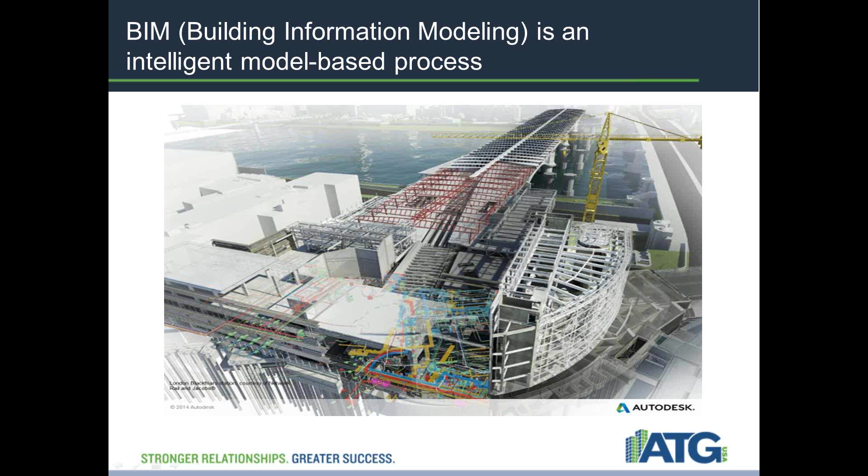So building information modeling is an intelligent model-based process that provides value across the life cycle of a project. That's any project. BIM is the first truly global digital technology and will soon be deployed in every country in the world. The BIM process involves creating and using an intelligent 3D model to inform and communicate project decisions. A process shift to building information modeling can fundamentally improve the way we plan, design, build, and manage our building infrastructure.

The U.S. McGraw-Hill Construction Research on BIM from 2007-2012 shows an expansion of BIM adoption over that period. The U.S. is not the only country implementing this BIM software. Scandinavia, Australia, and more recently South Korea have adopted BIM and are utilizing it as well.

BIM also contains most of the data needed for building energy performance analysis. The building and properties in BIM can be used to automatically create an input file for building energy simulation and save a significant amount of time and effort on your side. Moreover, automation of this process reduces errors and mismatches in the building energy simulation process.

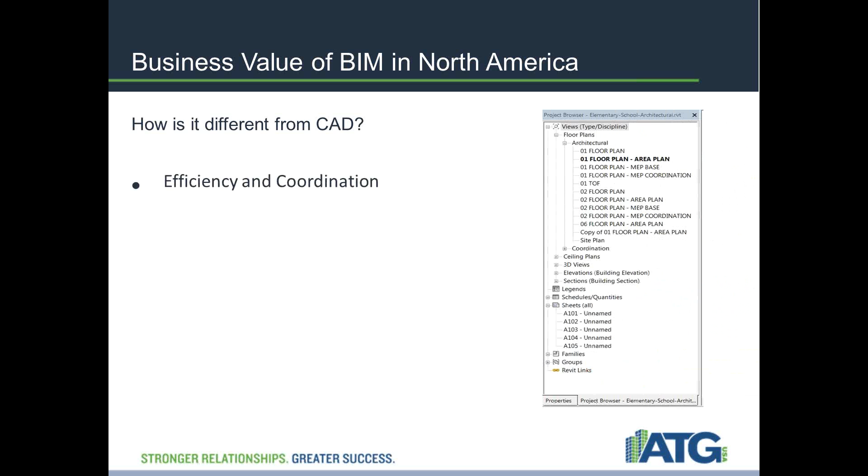So how is this different from CAD? In the traditional design process, individual 2D designs are passed between consultants and manually checked. With BIM, the intelligent models of the building can not only be passed between consultants, but also combined into a single model and checked with clash detection software to ensure coordination. Everything can be quickly accessed through the project browser. This is faster and also reduces the chance of human error, as information does not have to be continually recreated. This also reduces errors and omissions.

All design information is stored in a single coordinated model, enabling you to generate every schedule, drawing sheet, and 2D and 3D views directly from the model. Revisions to your design are automatically updated, minimizing errors and omissions. As you can see in the project browser, we have all of that information stored in one model.

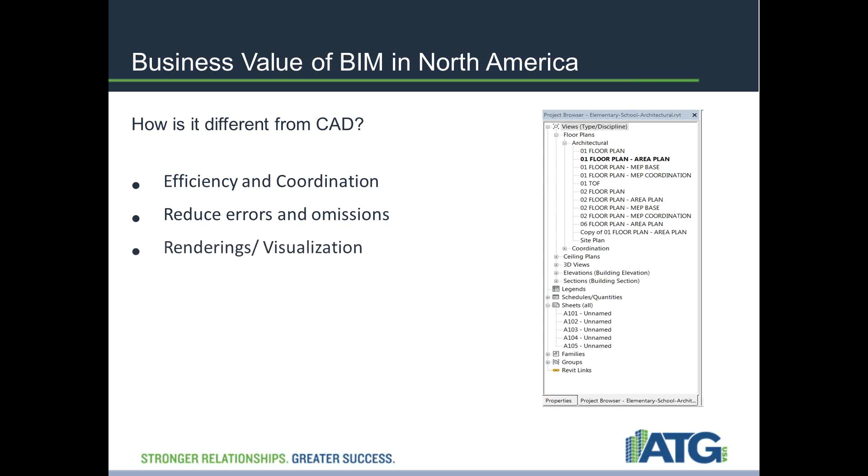Also, rendering and visualization of the BIM model creates high-quality photorealistic 3D renderings, which build a visualization tool that impresses your clients and ultimately helps you win business.

In this workshop one, we're going to be covering some topics: building a mass model. We'll be creating a new solid form. We'll be joining some of those forms together. We're going to be creating a solid and void. We're going to be creating a lofted form out of that. And finally, we'll be saving and loading that into a project.

So for what that looks like, we're going to go ahead and start with a mass. A mass is a solid or void form typically used for conceptual design and the sketch phase of a design. With the massing tools available in Revit Architecture, you're able to create a composition with free forms quite easily. Smooth corners, curved walls, and curved holes in walls are all possibilities with the massing tools.

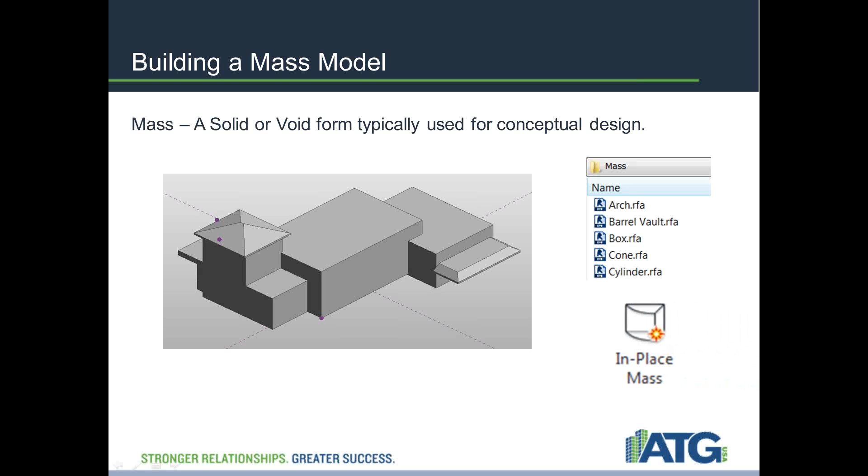Some of the methods that are provided in Revit that allow you to do this is conceptual massing in Revit. The first is to make a conceptual family, so you can utilize some of the family content that's provided in the Imperial Library to produce, use and manipulate some of this mass content to be able to build that. The second way is to make an in-place mass. So you'll notice that icon that I just pulled up there. That'll give you the option to create a mass in place.

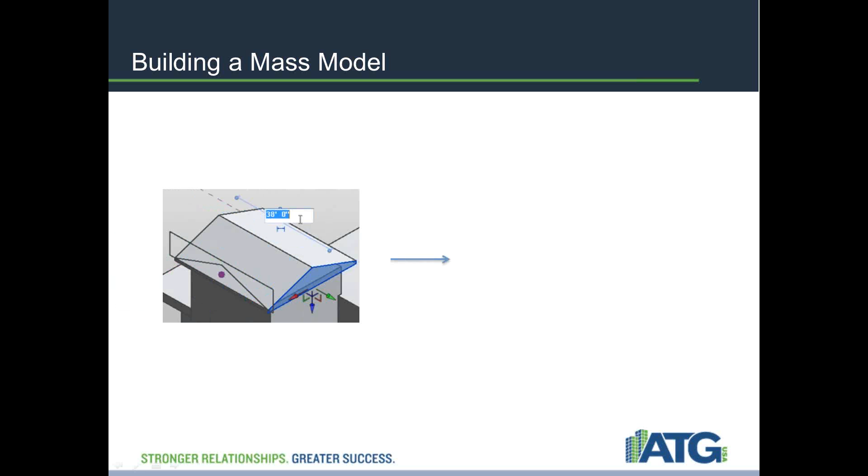So furthermore, in the workshop, we'll be using the existing mass modeling tools and some of the additional mass modeling tools inside Revit. So after completing my sketches for the conceptual design, the next step is to select the sketch and create a form. So in the exercise, I'll be using solid and void forms to create the pitched roof, much like what you see here, and then furthermore, resulting in a roof like this.

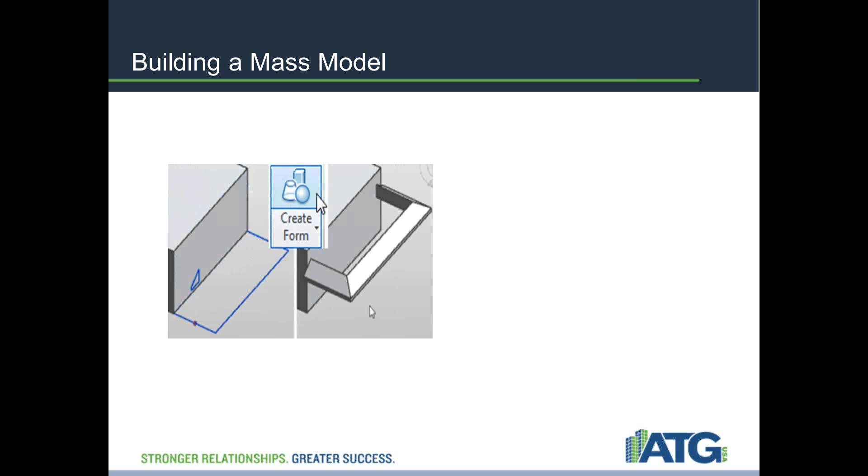Furthermore, we'll be exploring and executing creating a lofted form, existing project, and loading our created mass model into a project. So this is the icon that you'll be using within the family to load that into a project once it's created. So you might be asking, well, what does this look like? All these icons and all these illustrations I'll show you are actually from within Revit and within our examples and our projects, what we're going to be doing.

So with that said, I'm going to go ahead and switch over to our Revit software, and we're going to go through that workshop and go into depth on what that process looks like. Now this is our Revit interface. I'm just going to go ahead and open up a file here.

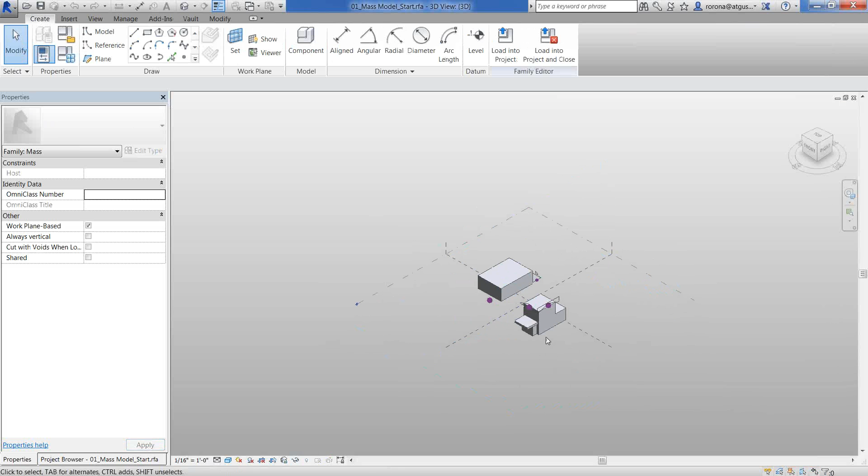Now, as I explained before, we're going to be utilizing an already constructed, partially constructed 3D mass model, and we're going to manipulate and add some more content to it, and go into depth on that process that we talked about earlier. So I'm just going to hit this home key, utilize my 3D cube here to manipulate the model and maneuver around as I need to.

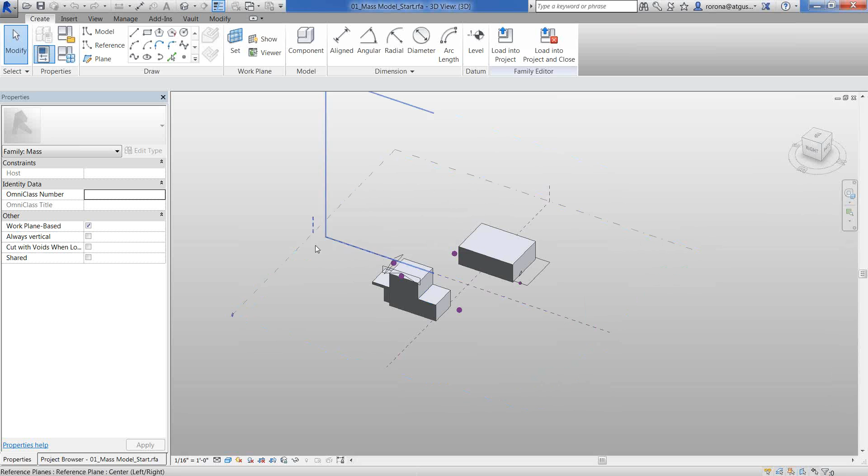Now, using my drawing tools here, I'm going to go ahead and first activate my levels. These are my levels that I've already pre-established. These are reference planes in which I can draw from. So I'm going to go ahead and select one of those planes. And now, as you notice here, in my contextual tab at the top, I've now been prompted to have access to my drawing tools up here in my ribbon.

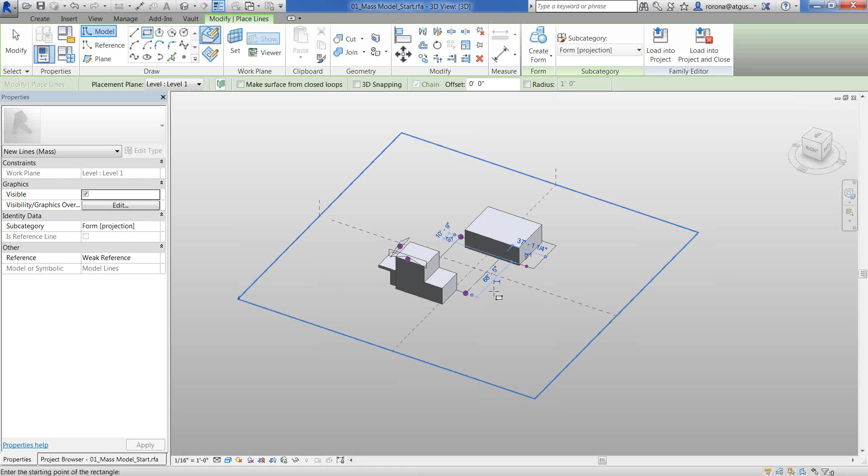So I'm going to go ahead and draw a square here. I'm going to use some of my reference points that I've already established. I'm going to draw that in there. So once that's drawn, I can select Escape. I can now select my form that I've drawn.

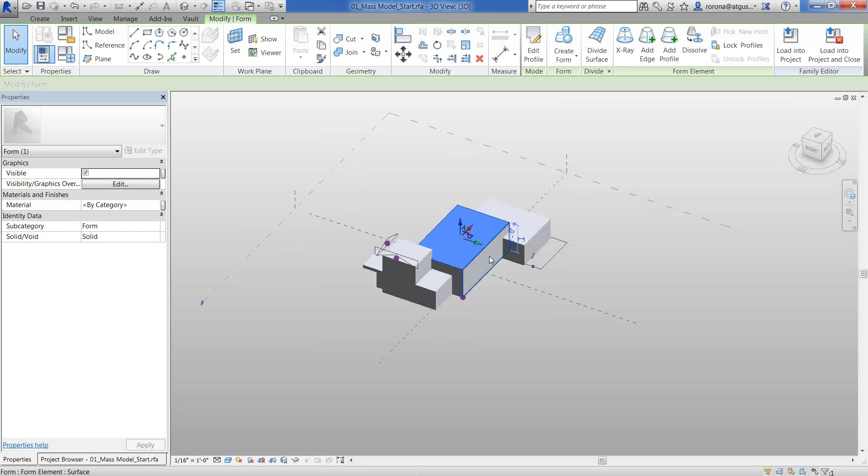And now here in my ribbon, you notice in my contextual tab, I have been prompted with some more editing features. Now that I've created my area that I'm going to extrude and create my form from, I'm going to go ahead and select that and select solid form. Now that I've created this mass, I want to be able to attach this mass to my other objects. So I'm going to go ahead and just click away.

And in my Modify tab right here, we have the option of joining geometry. So with that selected, I'll be able to select first my geometry that I want to join, and then secondly, the geometry that I'd like to join that with. So repeating that same process, I'm going to go to my east side here, and join these two solid masses together as well.

So now if I click off, you can use your Modify button here to exit your commands, or you can also use your Escape button. That's quite similar to the AutoCAD procedures. If you're used to using your Escape key quite frequently, you can migrate that over in Revit and use your Escape key to exit out of some of your commands there.

So zooming into our east side here, once we've combined our mass models together, we're going to utilize some of my sketches here to create that pitched roof that we were talking about earlier. So I'm going to go ahead and select this triangle up here at the left, and create a form out of this as well. So when creating this solid form, I now have the option to manipulate it with these options here.

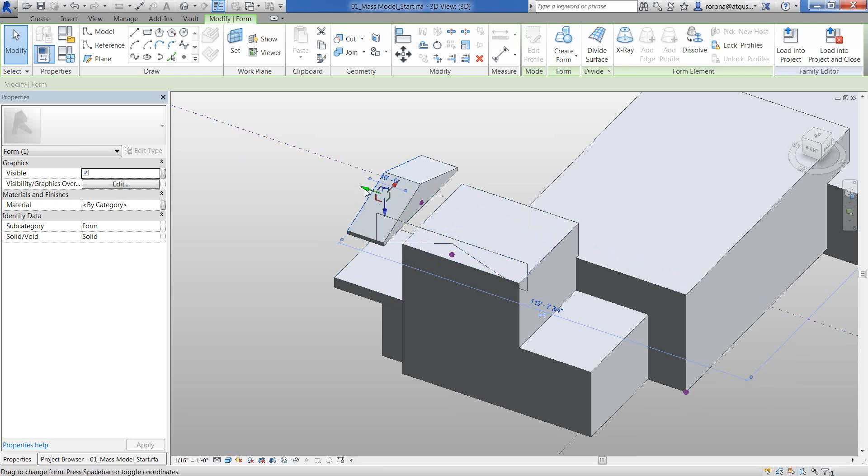This is kind of off my roof area. I want to utilize these grips here to move this one to the direction that I want to extrude this to. So once I bring this out to over the roof here, I can now use my temporary dimensions to add a value in here. So with that said, I'm going to go ahead and add in 38 feet.

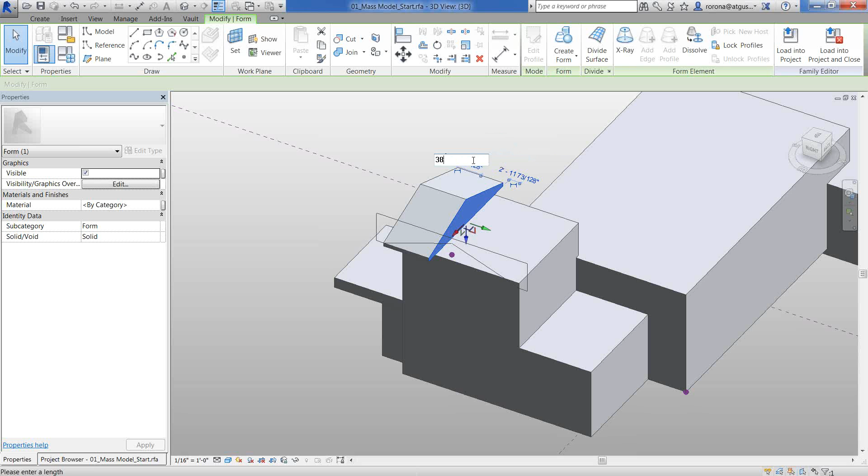Revit automatically identifies units as feet. So if I just type in 38, it's going to identify that as feet. If I type in inches, of course, it's going to be as inches as well. So now you can see I've extruded that over from that point 38 feet over this area, this building area here. I can then select out or escape.

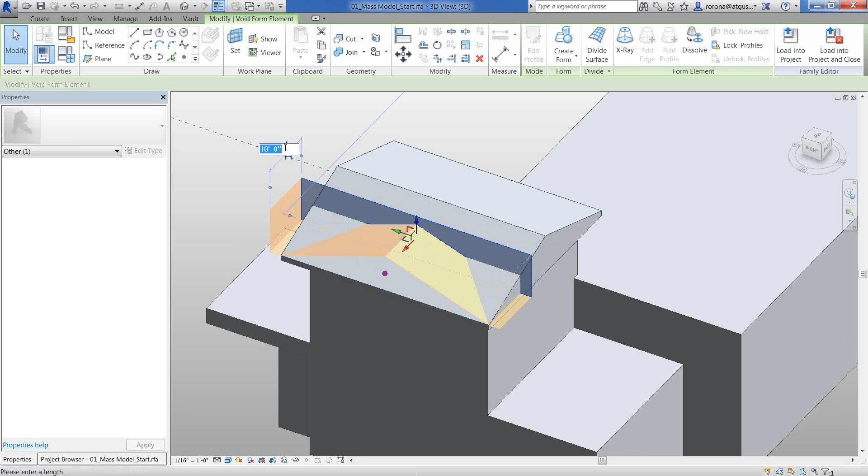Now I want to then create a void form, and I want to extrude that this way here. So I'm going to go ahead and just come to my void form, create my void form. So now again with my arrows, I have the ability to manipulate this solid mass and maneuver it in whichever direction that I please. So I'm just going to go ahead and type in a value here. I'm going to type in 36. So with that solid form, it has enabled me to create this roof type here that you see and what's illustrated right now.

So now what we're going to go ahead and do is move over to this area here, and that's going to be creating the lofted form that we previously discussed. I have my previously sketched out direction here where I want this to be extruded out from. And I also have my shape. So I've established my shape on where I want that to be driven in my path.

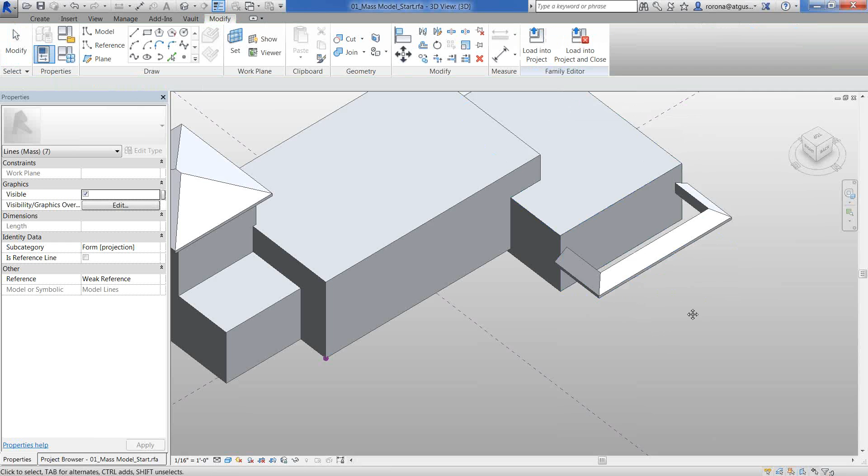So I have to come in here and select, you can hold your control key and select both of those forms. And then come up here and select solid form. That's going to create that solid form that I had established and the route that I had established it to. So again, this is for conceptual design. This is a quicker way to quickly draw your content and then bring it into a project and apply materials to it, whether it's roof, walls, and such like that.

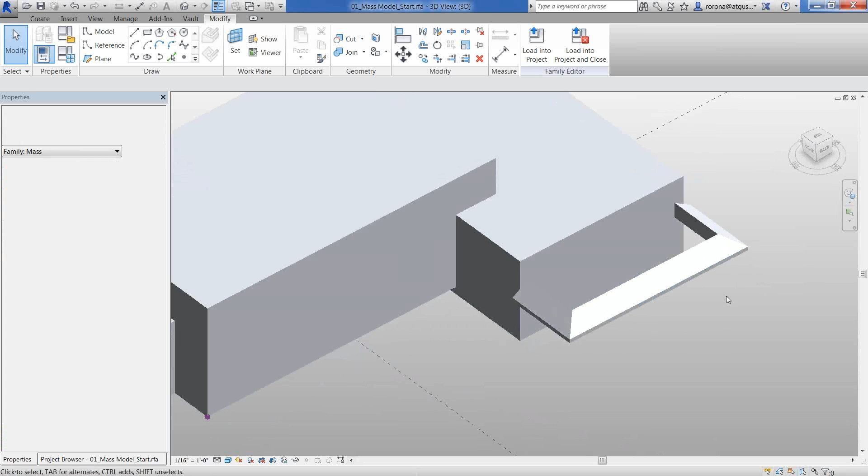So with that said, I'm going to go ahead and create another extrusion with my plane already being established as my working plane. I can then use my 3D cube here to maneuver around the model and further draw some more content in here. So I'm going to go ahead and draw and cover this. I want to enclose this roof, this overhang here.

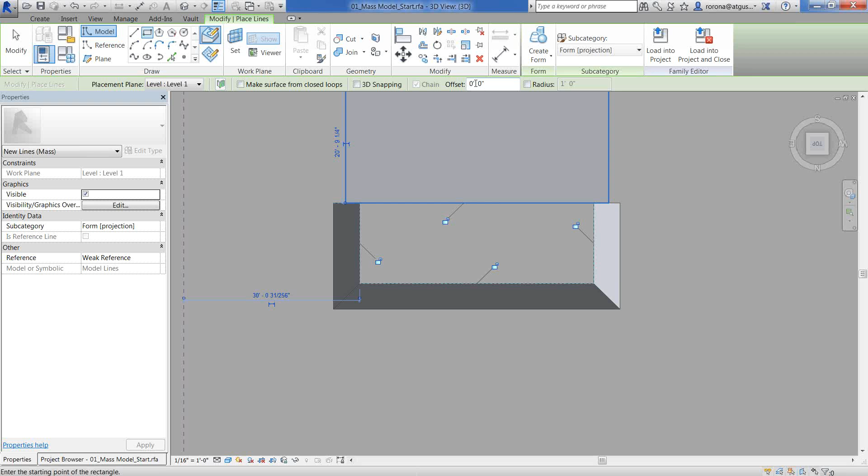So I'm just going to use my drawing tools to draw a square. I can set the offset for whatever I'm drawing. If not, it's going to set it to a default offset. That's not a problem. That's something that you can manipulate later. So with that said, I'm just going to go ahead and create a solid form out of that.

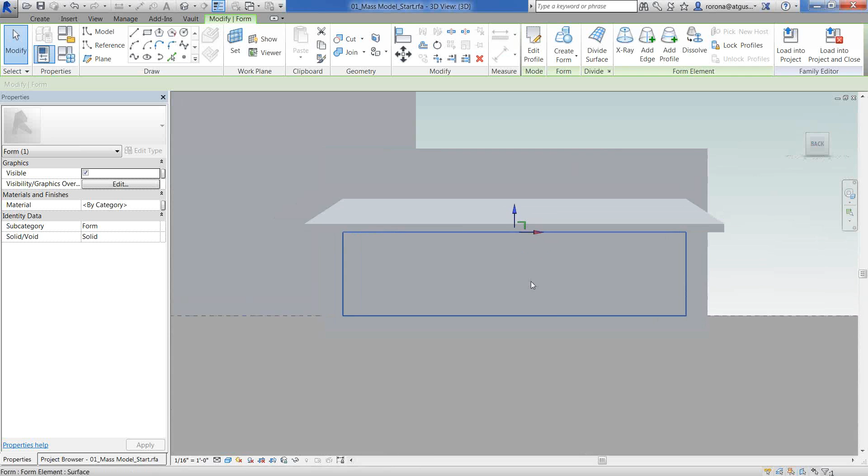Now I'm using my shift key to kind of hold down my center button here. As you can see, that's not exactly where I want it to be. So I'm going to go ahead and alter that a little bit. So I'm going to use some of my view cubes here, some of my views here. I'm going to select my form. And I'm going to go ahead and maneuver this up. And some errors here.

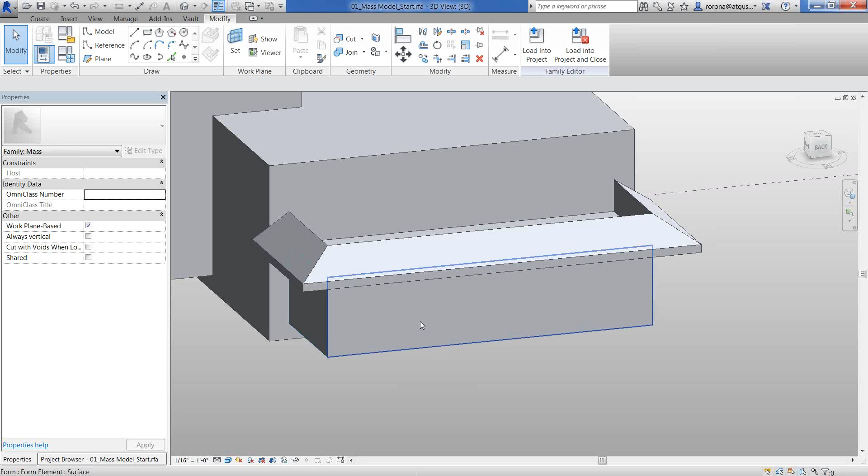A lot of times you want to make sure that you select the object. A good way to do that is, instead of selecting a surface of the object, you want to select the entire form. So I want to hover over it and press Tab until I'm able to select the entire form. And now I'm able to maneuver it and move it where I need to.

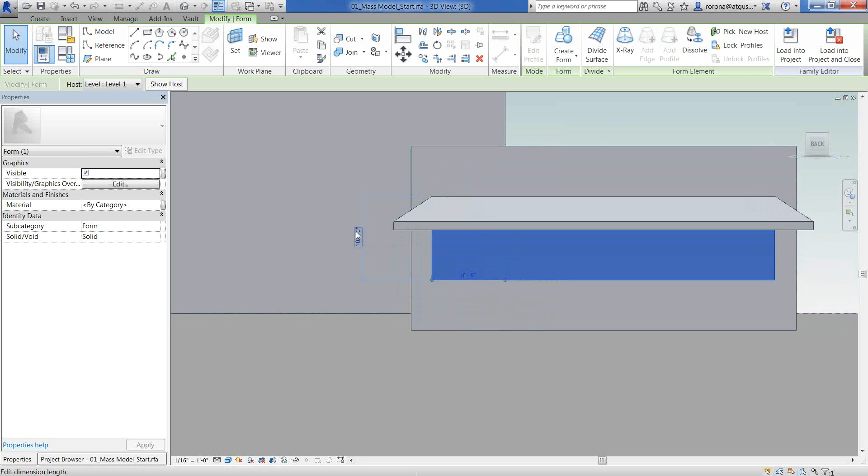So now you can see my temporary dimensions have been displayed. So it's showing I have it flush up to the ceiling here, but it's at 10 feet in depth. I want to go ahead and change that. I'm going to change that to a foot. And again, I might be able to move that up here to the top of my form, making sure that my grip settings are turned on as well.

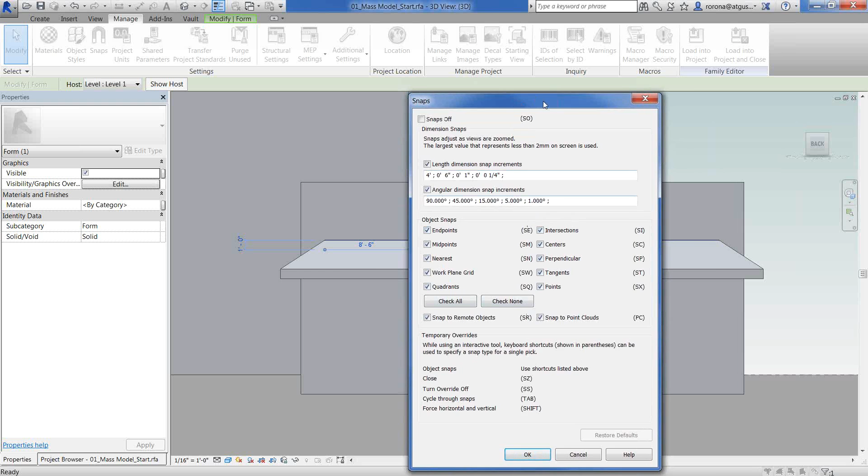A way that you can manage your grip settings is if you go to your Manage tab here and you go to your snaps. This is quite similar to what's displayed in your AutoCAD environment. You're going to notice all your snap settings here. You want to make sure that these are all selected just so it can allow you to easily snap to those points and those intersections.

All right, so with that created, we have a good, solid conceptual design that we have here. So with that said, I'm just going to go ahead and minimize this. You have the option of saving this as well. You can save this to a default location, whether it's your desktop or on a server. That way you can insert that and bring that into a project later.

So if I wanted to do that, I can save it. Or if I wanted to work within this project, I can just minimize this solid form. And now I'm going to go ahead and open up a project that I've already established. So there's multiple ways of inserting this content in. Again, if I save this to a different location, one way that I would do this, and when this pops up, I'll show you how to do that.

So this is a blank model. As you can see, I've already established some of my levels here and already created them. I want to bring this model in on my ground floor, so first off, I want to make sure that that's active. So a couple of ways of bringing in this mass object, this mass model that I've created.

So if you go to your Insert tab here, and you go into Load Family, because essentially it's a family. So .rfa is what the extension is going to be for a family. And so I can then navigate to my area to locate that and bring that into the project. When I bring that into the project, where I'll be able to locate that is going to be in my Architecture tab, and I'll go to my components. Now it's going to be stored into my components here, and I'll go to my properties here. I'll be able to select the content and drop it into my project.

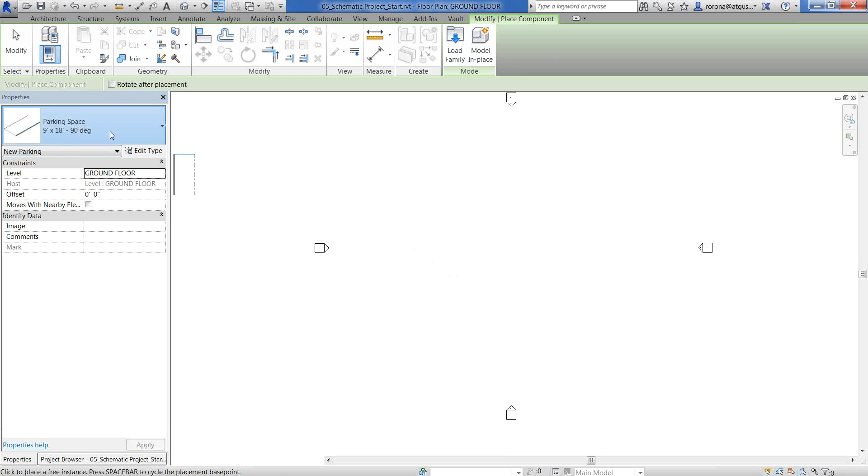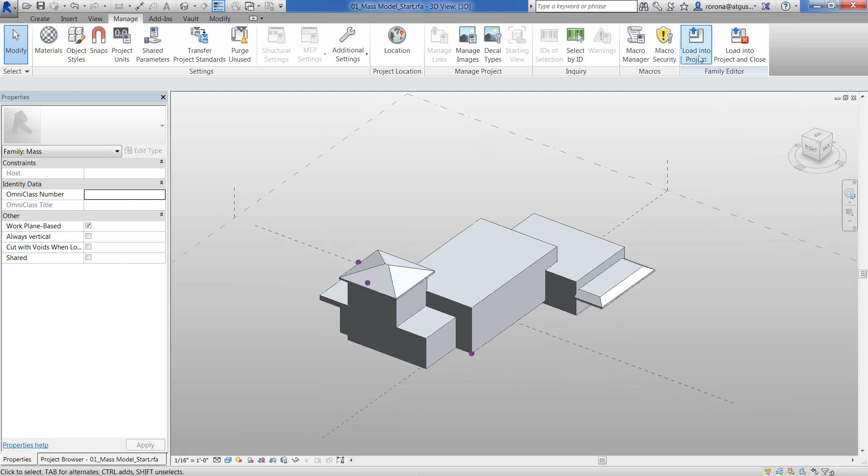So as of now, as you can see in my properties here, I don't have my mass model loaded in or brought into this project. So I'm going to go ahead and do that. So just using Control Tab to switch windows, I now am able to quickly just navigate back to my model massing that I had previously constructed. And I'm going to go ahead and load that into the project. So up here at the ribbon, you'll locate the family editor, and I'm able to load that into the project.

So if I have multiple projects open, it's going to generate a list of the projects that are available. That way I can select and bring in. In this case, I only have one project open, so it's automatically going to load that into that project. This is just a little information notification box. It's telling me that Revit has enabled the show mass model mode.

So you want to make sure that your visibility settings are turned on, and I'm just going to go ahead and escape real quick. If you type in VG, it's a quick way to go to your visibility graphics. In a view, anything that's going to be a solid mass is going to be under model categories, under Mass. So I'm going to type M to quickly navigate there. You want to make sure that this option is turned on.

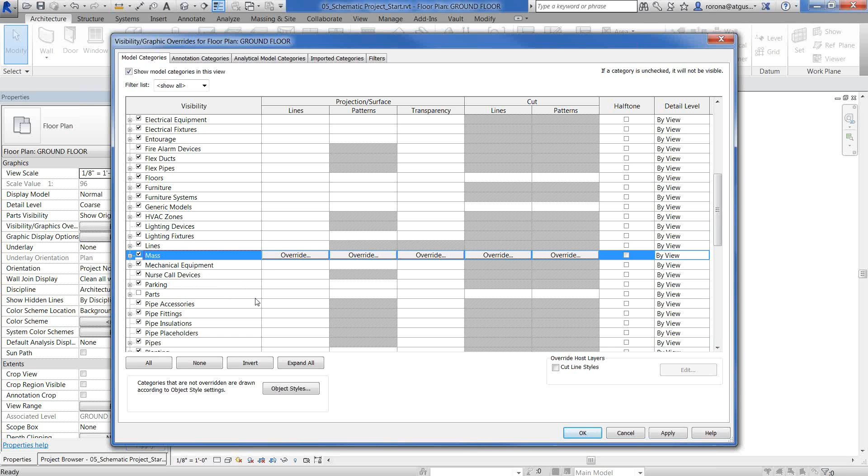If this option is not turned on, when you bring a solid mass in, it won't be visible in your view. So that's one of the first things that you want to make sure is turned on in your visibility graphics within your view so that you're able to see that content. So I'm going to go ahead and check that box and say OK to that.

So now if I go back to my Architecture tab and my component here, I can select that, and now I can see that my model mass that I have previously loaded in is now populated in my properties. So I'm able to select that model and bring that in. So before placing this, again, if we note that I'm on my ground floor plan here, that's going to be my active work plane that I'm setting this model in.

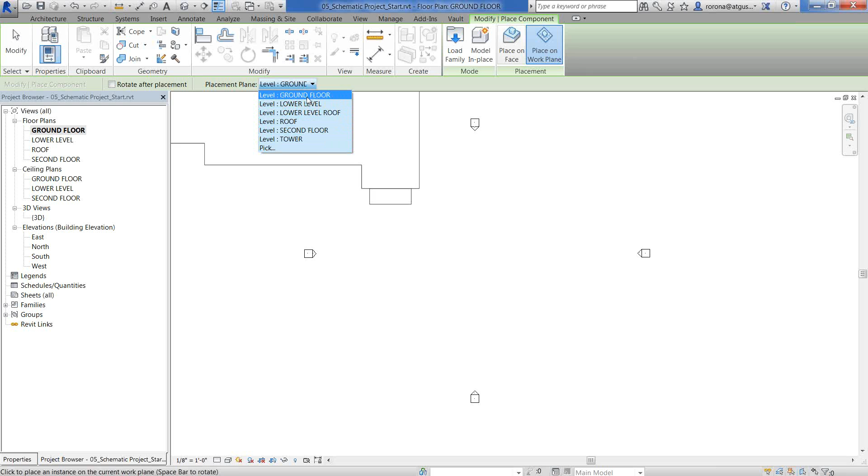You also have the option of placing this in a different plane within this view. So if I come to my options bar here, I can select which level I want to set this to. I want to set this in my ground floor level, so I'm going to go ahead and set that here. There's not a project location specified. Usually, when you're starting a project, you want to first identify your project location, the geographical location, and the coordinates of where that project's being set, and use a reference point to bring your solid mass into Revit in those coordinates.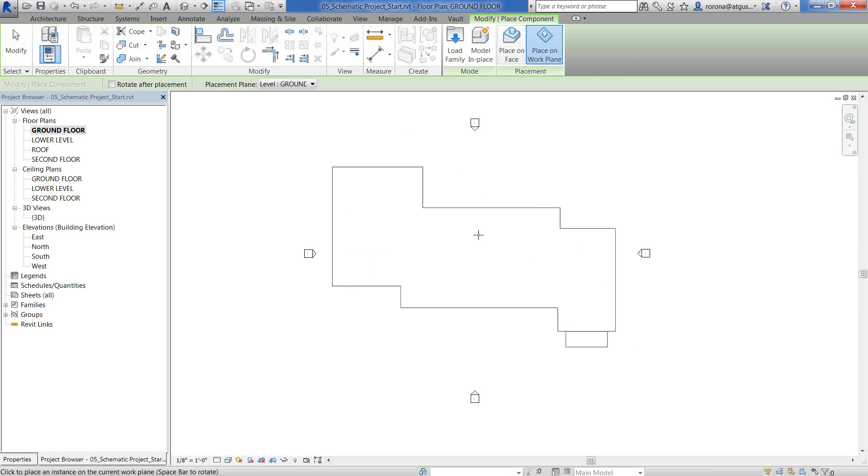In this case, I'm just going to place it into our model just for representation purposes. Once that's placed, I can then hit my escape key, or just hit my modify key up here. So now I have my solid mass in here. I want to first pin it.

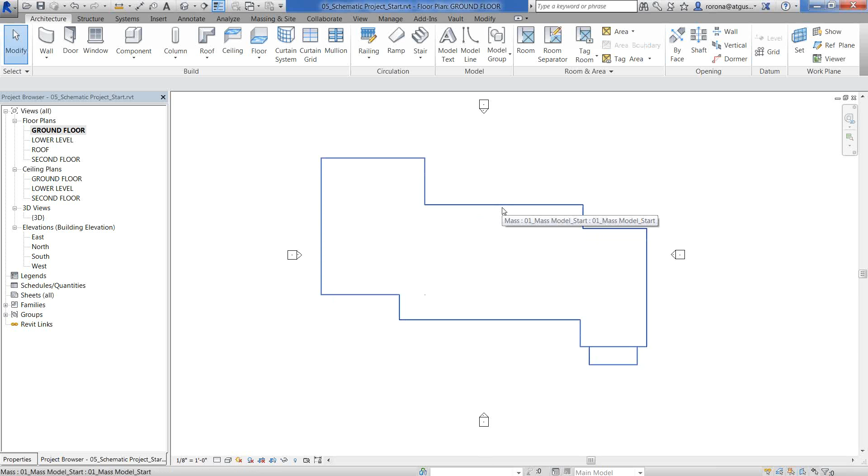Anytime you bring content into your Revit model, especially if you're bringing it into an exact location, geographical location, you want to make sure that you always pin this object. A lot of times working within Revit, whether it's viewing or moving small content around anywhere, you can easily select the model and maneuver it around a foot or so, and that can cause a lot of problems as far as coordination and future design options, and it can cause a lot of problems in getting things mixed around for you. So you want to make sure that you pin that option. To verify if it's pinned, when you select it, you'll see this pin icon here representing that it's pinned.

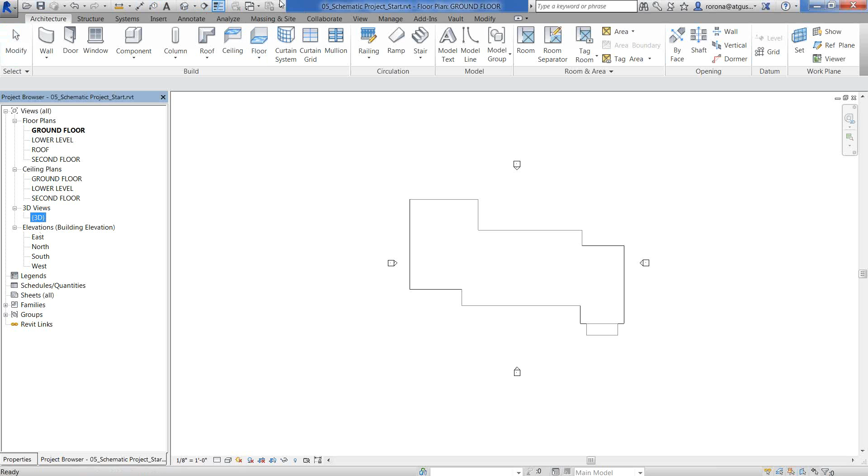So then selecting off of that, now that that's part of the model, it's set on the ground floor, I'm able to go to my 3D view here. I've already established a 3D view here, or I can come up to my quick access toolbar here, and I can select my home icon, which is the icon to create a 3D view. I can select that, and that's going to automatically take me to a 3D view of what's in the model. So as you can see, there's my solid mass. It's been placed and it's been pinned.

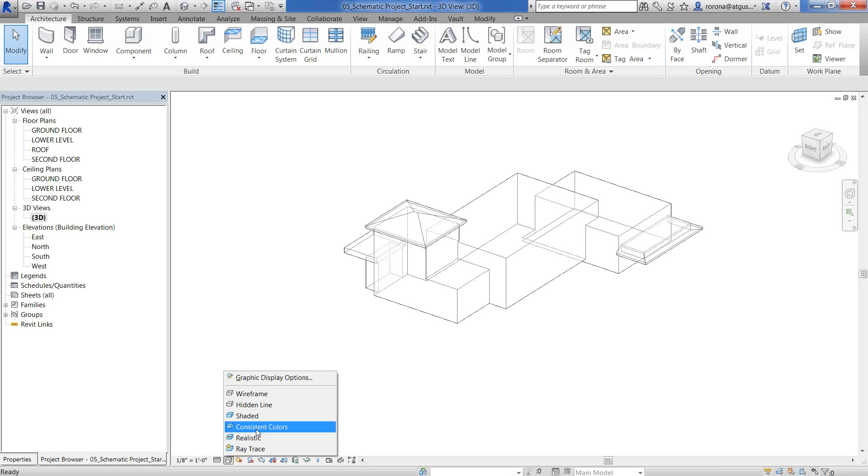There's different visual styles that you can apply to this mass to represent and show it better. That's located at the bottom of the screen of every view within Revit. So I'm able to select this and change it to fine, and also change this to consistent colors to have a better realistic view of what my model category looks like. Now, since this is just a conceptual mass, there's no building elements attached to this. There's no roof. There's no walls. As you can see, it's all one object. And if we go to our properties, it's going to display my model mass here.

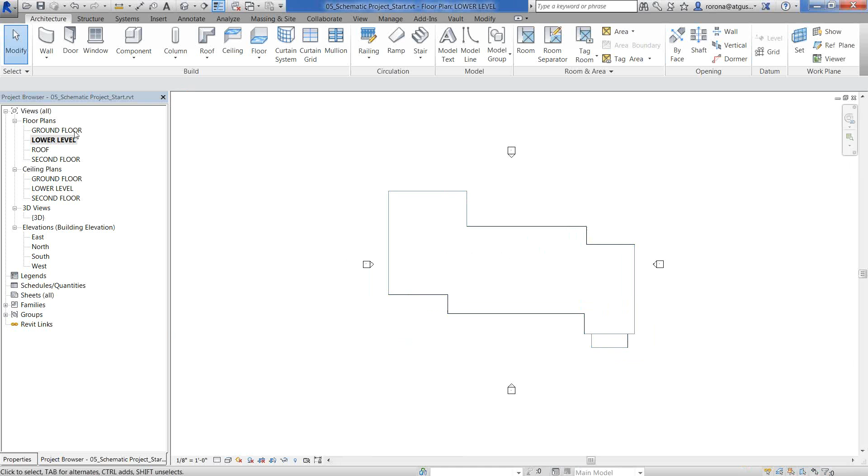So within Revit now, since I've already had my levels established here, I'm able to go to my different levels and see the floor plan being represented on those different levels since I brought it into my ground floor plan. Now, in our later workshops, using our solid mass, we're going to create the floors associated to this mass. We're going to put in a roof and do some further exercises using this same mass model. So then going back to our slide here, we're going to show the content we're going to go over in our next workshop.

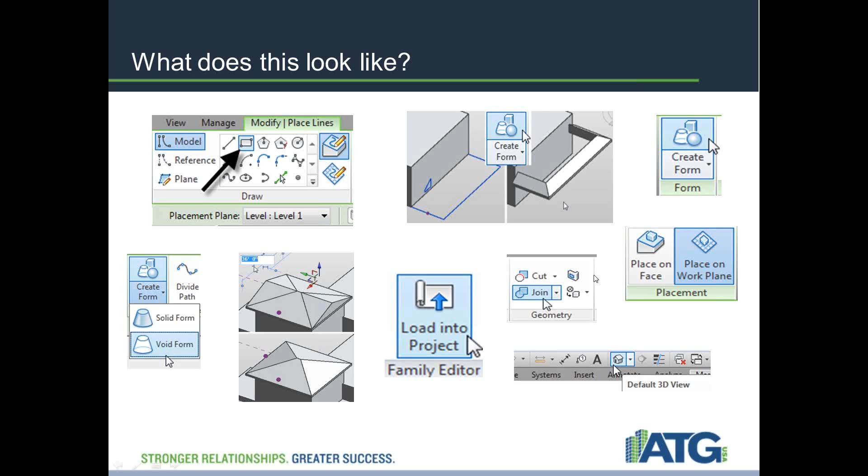In our second workshop, we're going to talk about creating the mass floors. We're going to analyze the mass floor area. We're going to create the schedules for mass elements. We'll be able to adjust the schedule formatting to display vital information from the model, and also professional requirements involved in that model. We'll modify and update the model and perform an energy analysis on that. And furthermore, we'll view the results and compare the information in a report.